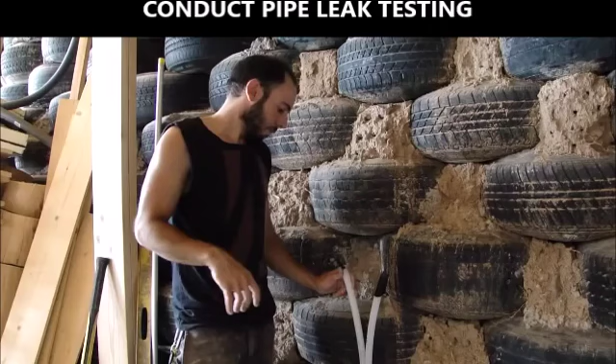Okay, so here is our supply line. It's going to supply all of the cold water to the plumbing system, and we're going to do the hot water afterwards. Test those fittings. So I just have a piece of duct tape on here, so that no dirt got in here over the winter while I was gone. And here's our 3/4 inch PEX pipe.

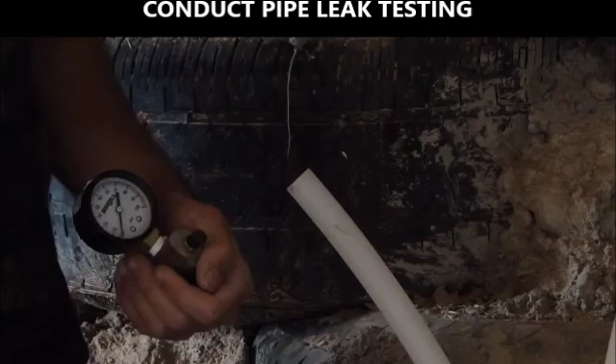First thing we need to do is take our 3/4 inch crimp ring, slide it over the pipe. Then we take our fitting, slide that onto the pipe, like so. Then we take our crimp ring and pull it back over the fitting, about centered on the fitting. You can see it through the pipe. And we take our 3/4 inch PEX crimper and slide that over the crimp ring. Get it on there centered. And then we crimp. Okay. Now that our fitting is connected to the pipe nice and snug, we're ready to pressure test.

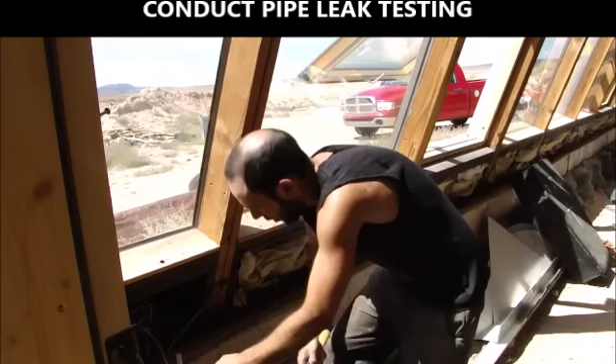Okay, got our air compressor with our attachment here, and here is our gauge. Let's see what happens. Huh. We're not getting any pressure because I have an open end in this. We gotta go cap that open end. So we have a hose bib right here that has an open end. It's part of our cold water system.

So I'm just gonna get out one of my 1/2 inch crimp rings to fix this. Last time we did 3/4, this time I'm doing a 1/2 inch crimp ring and a 1/2 inch plug. Pull this up over so it's centered in the middle of that fitting there. Center our crimper on the crimp ring and crimp. There we go, capped end.